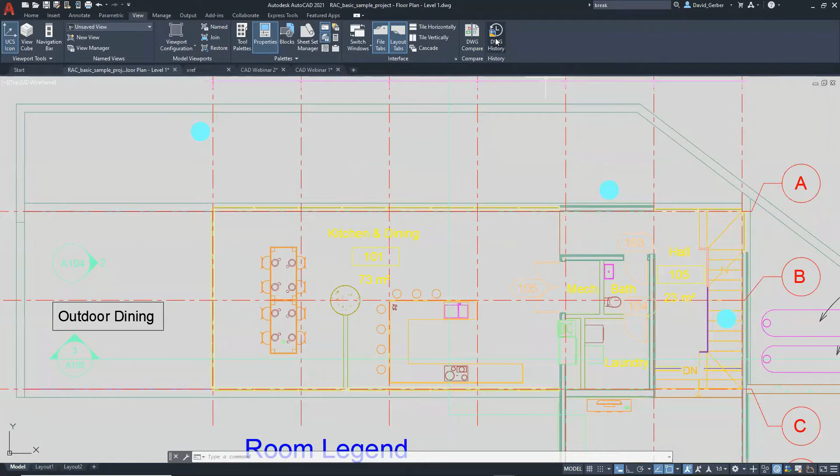If we just go into our view tab, we have this DWG history. Let's just say our client originally wanted a wall here and moved the island around. Then they got back to us after the weekend and said, we talked about it, we actually don't want that wall there anymore, can you please put it back to what we had before? I'm sure you guys have had that kind of discussion before.

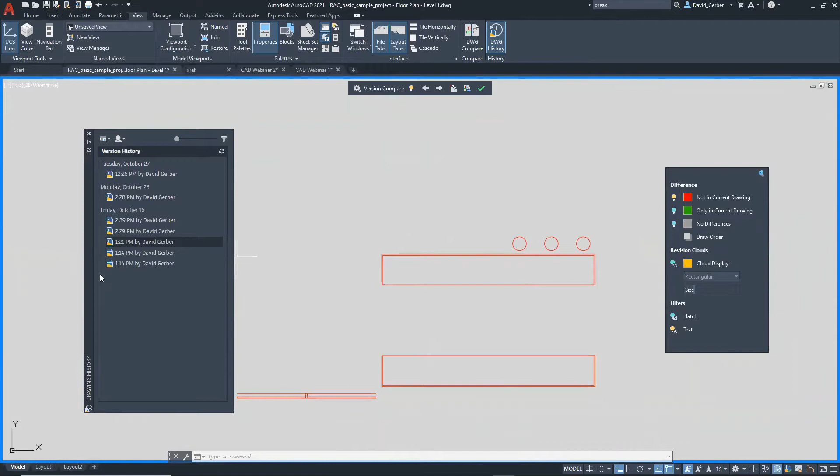So now we get this little DWG history, and I can actually have a look at what the old one was. Let me just check, yeah okay, so this one for example. It gives us this little layers-type panel where we can turn on and off. I'll just turn off the no differences, and now we can see what's not currently in the drawing. I'll move this away as well, and we can see what is in the drawing.

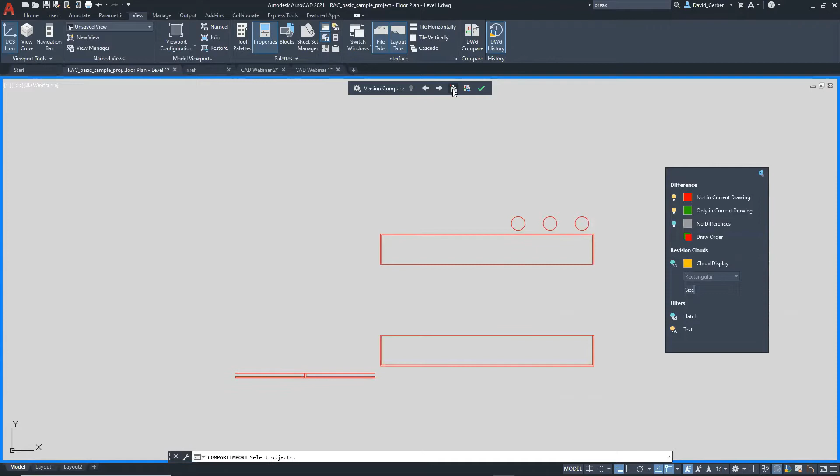So if we did want to go back to what we wanted, say our client wanted that wall gone and wanted it to be open concept, we can just delete that here. We'll turn on what's not in our current, and then use this little import function here. Let's just select everything, press OK. You'll notice it disappears, and that's because it's actually in the drawing now. And now if we just press this, you'll see our drawing has gone back to our previous iteration. So that just saves time.

If I personally ever had to do some sort of change, I'd just basically copy this and move it away here, so that if the client ever did want to change it, I'd just move it back down. That just alleviates that necessary workflow, I guess.

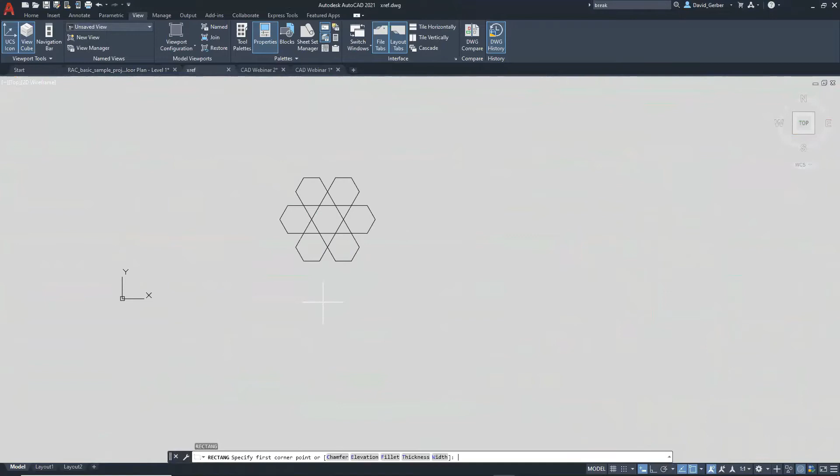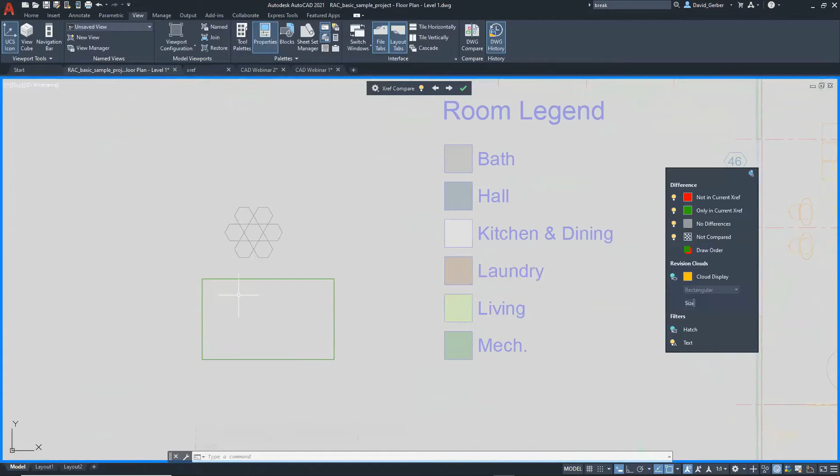We also get the same kind of thing with XREFs. Let me just go to this XREF and maybe put a rectangle in here. I'll save it. If I go back here, you'll see we get this little notification now, so you can turn that on and off if you don't want to compare it. But basically, if I do reload it, it'll do that same kind of workflow where it shows what was in the XREF and what was not, and it'll just show you the changes. Then as soon as I just press check, it'll just reload it.

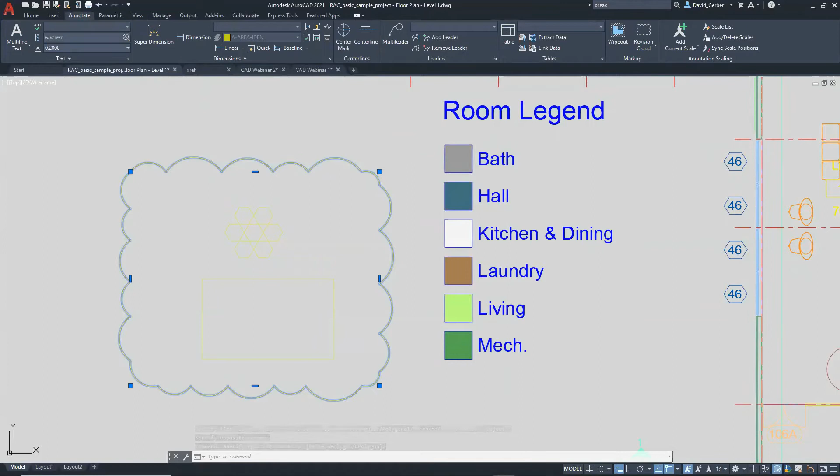Revision clouds are also improved. Let me find it. If this was a revision, I'll change the color because it's a little off, let me find a better one. Layer 0, there we go. So now it actually is its own entity. If we bring the properties over, you'll see it's actually a revision cloud now, which means we have a lot more things we can do with it. Maybe we don't like how big the bubble is, we can change that. So that's been improved as well.

There's also a quick measure tool, which is pretty handy. If you like to type stuff, it's just measure and then geom. If not, you'll find it in your home tab, just where our normal measure tab was. If you just click down, you'll see that there's that quick one now.

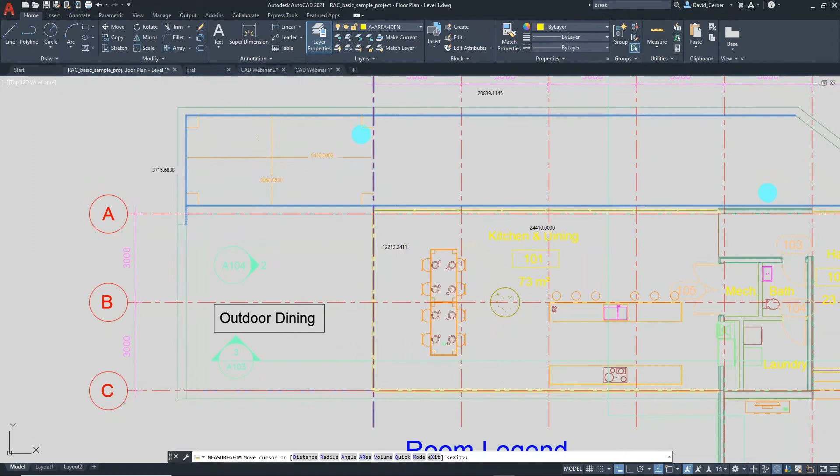What this allows us to do is, for example, I'll go to this one where you can actually see it's already giving us the dimensions without having to measure anything. So we can see it's 3000 millimeters. And if we just click down, it will actually create that area tool. If we just hold shift, we can add a couple more areas, and you'll see it's already calculating that area. It's in millimeters squared in my case, but at least you don't need to use the area command anymore, and the perimeter's there as well for you. So it's just a very quick and easy way to check a few things.

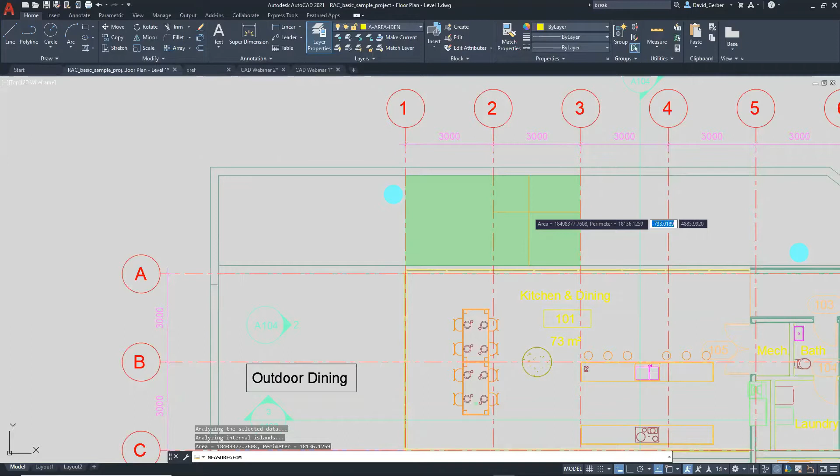You'll also notice the little right angle signs. That's just basically telling you that those lines are at a right angle for you.

The trim command has also been improved. I'm just going to switch to this one here and create a couple of things. Now the trim command is smart enough that we don't need to worry... oh, I changed it back to the old one. Let me just go to this one. It's smart enough now to know that we don't need to select what we want, and same with the extend as well - it'll extend it back. So that's same area here, trim and extend, but now it's a bit smarter.

If you did like the other one, you could just change it here, some mode, and then we'll go back to the standard mode, which is where you have to actually select stuff. Just change it back to quick.

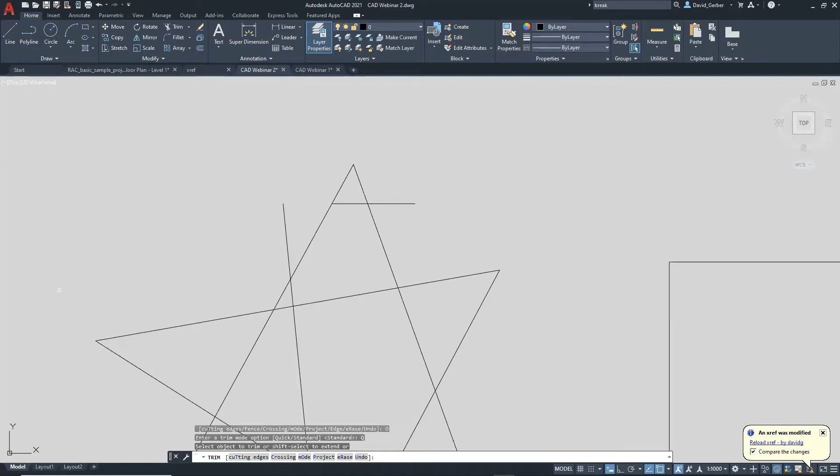So that's very quickly some things for the new 2021.

If you started to play around with blocks from the last time, you'll notice that insertion point is pretty far off - you can actually change that. We'll just go to bedit, which is our block editor. If we notice, it's just off to the side basically. So all we have to do is move it to 0, 0. And then we just close our block, save the changes, and now you'll notice our insertion point is where it needs to be. That may or may not be useful depending on if you wanted your insertion point to be that way, but it's just something to note.

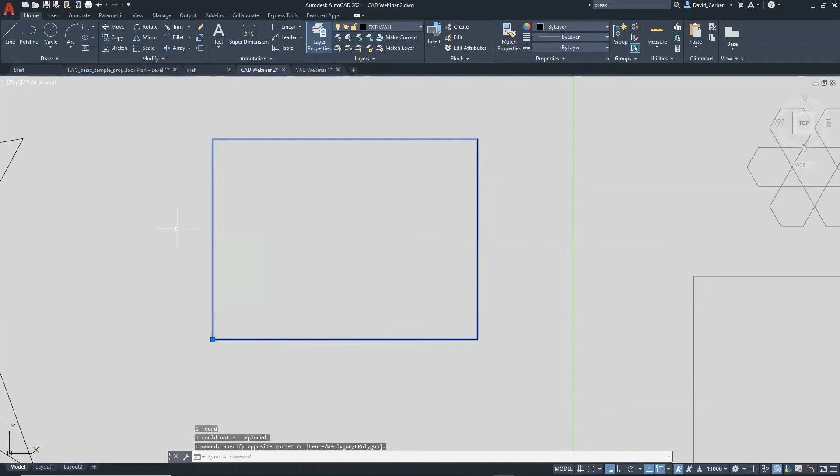Maybe also when you made the block, you wanted it to be explodable but forgot to do it. So if I did explode, for example, you can see it could not be exploded. Again, I can change that in my bedit. I'll just go back, and in my properties here you'll see it says 'allow exploding', and I'll just say yes, and save the changes. Just move that away, and now if I explode it, now it's not a block anymore.

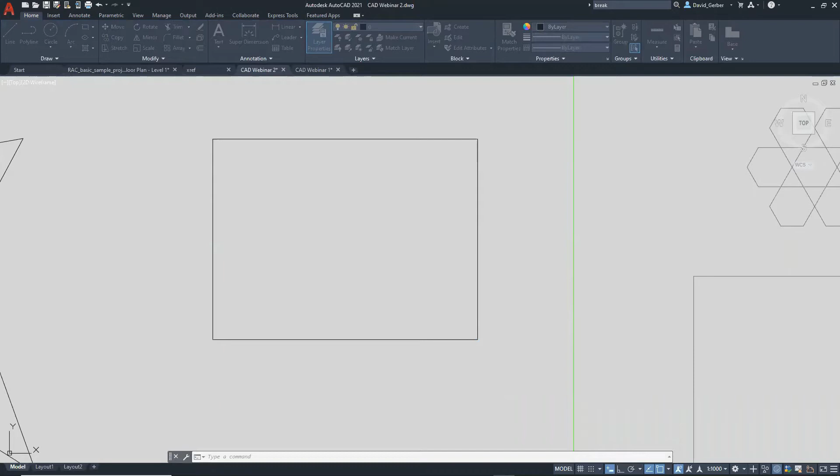We can also rename blocks. Say we made a mistake, we'll just get this little one here, so maybe 'block edited' or 'rec edited' - we wanted it to just be that. So now that block would be renamed.

In terms of some handy commands, sometimes you do some work and then you wanted to bring back what you've done before. So there is an oops command - I'll do a new one. So we did some work and then we deleted that, and then we did some more work. We're like, oh, actually we don't want to undo the work we've already done, but we did need that back. If we just did oops, it'll bring that back for us, so that way we don't have to worry about redoing work after our 'oops'.

There is also break, where you can select that and pick where you want to break the line, which is pretty handy because then maybe we want to fill out these ones, for example. It's basically just under here, the modify tab. So there are two now - break is the original one, but in the improved one in 2021 there's break at point. So we could just click that or type it, depends what you want. And we can just say break at point - you'll notice that these lines are actually just broken where I set it to be.

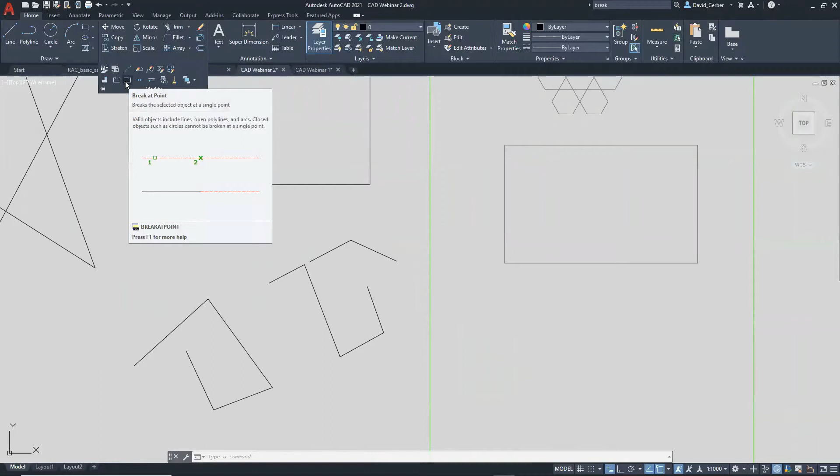That's just under the modify tab if you like to press that. And then again, it's break at point if you like to type, and just break is the normal one.

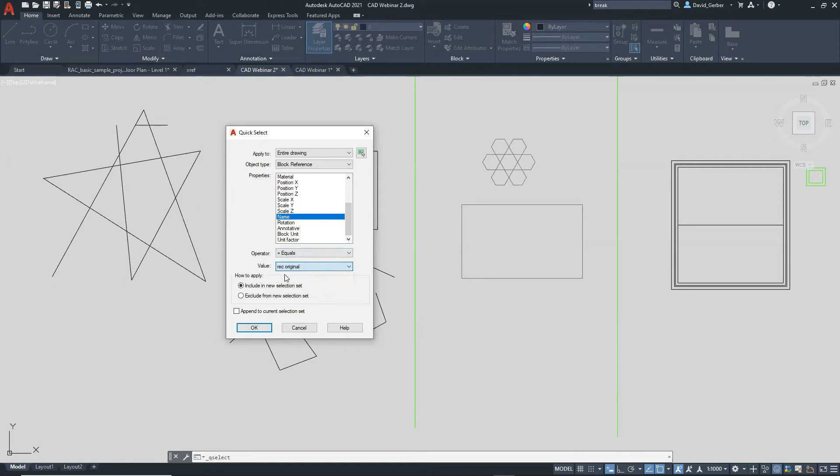Quick select is also something I like to use. So if you just right click quick select, I'll move it onto the screen, you get tons of stuff that you can start to pick. So maybe I want to get all my block references, and I can just find basically anything. You just specify, and it's really easy to find stuff. I guess I'll just go name, and maybe I just want this one. Select all the ones of that original, and it'll select it in the whole drawing.

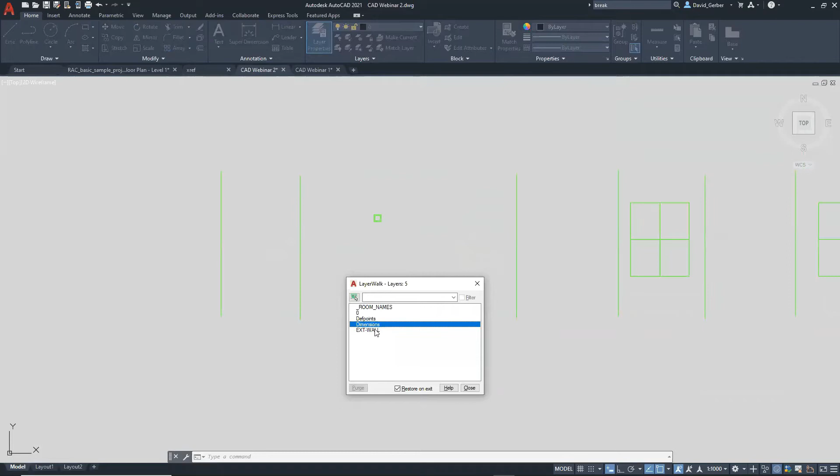Another similar one to that would be LayWalk. And that's just going to display all my layers. As I start to press on the different layers, it's going to show me what's on each layer, so I can see all my different things. As soon as you exit it, it'll just bring everything back. So maybe you're looking for something and you wanted to know where that element is sitting.

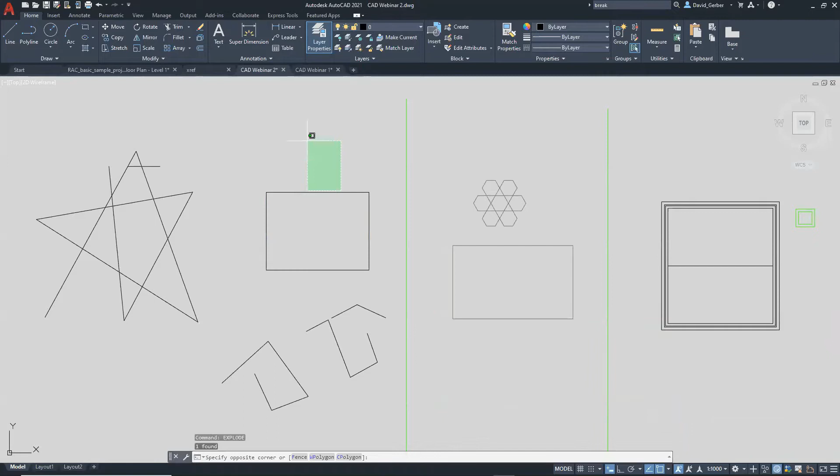Another command which is pretty handy is the boundary and join. A lot of people do use join. So actually, I'll just explode this one, and then I'll explode it again. So there is that join command, right, that we're used to using. So now it's that. But there actually is a boundary command, which is pretty similar.

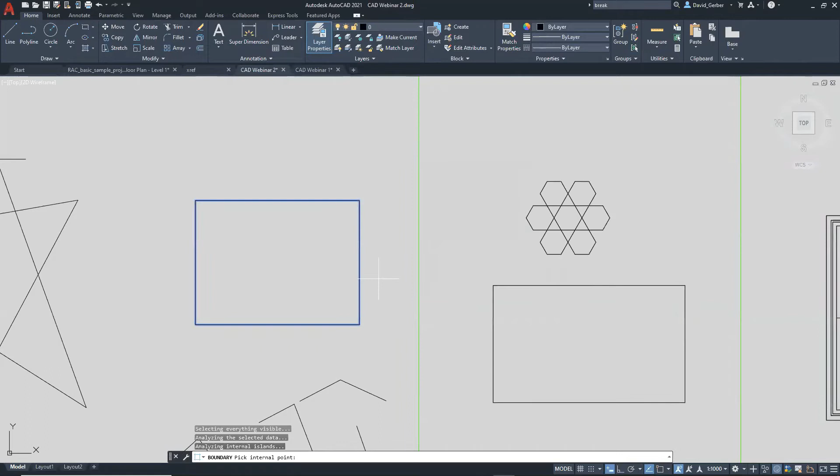It'll create a boundary basically of the same thing, and you can kind of say what you want it to be. So I'll just say here, and I'll pick that point. Now you'll see it's created this boundary, and now I can move it away. So maybe I didn't want these to be exploded, but I wanted to create a join and a duplicate.

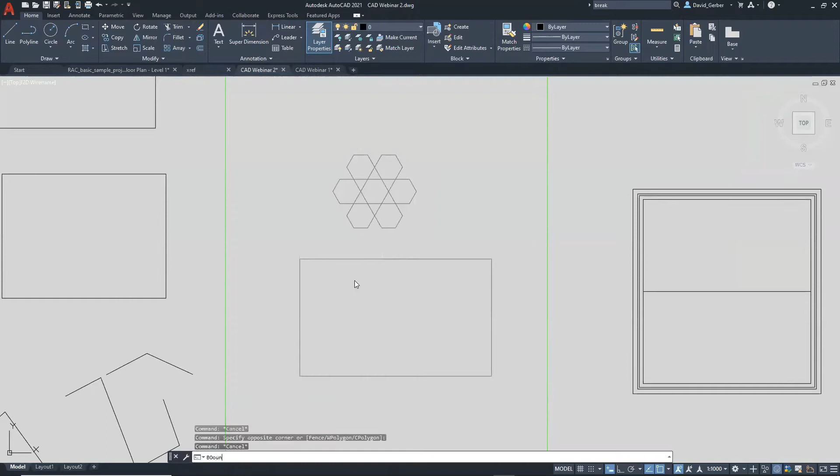So that can actually be transferred over to an XREF as well. So if I did do boundary, and I started to select these ones, it's actually transferred over from the XREF, and I could just copy them basically into my current folder, or file, sorry.

A similar one is ncopy as well. Maybe you guys are aware of that one. And ncopy will do basically that same thing. So I can start to select stuff from my XREF and then put it into my current drawing.

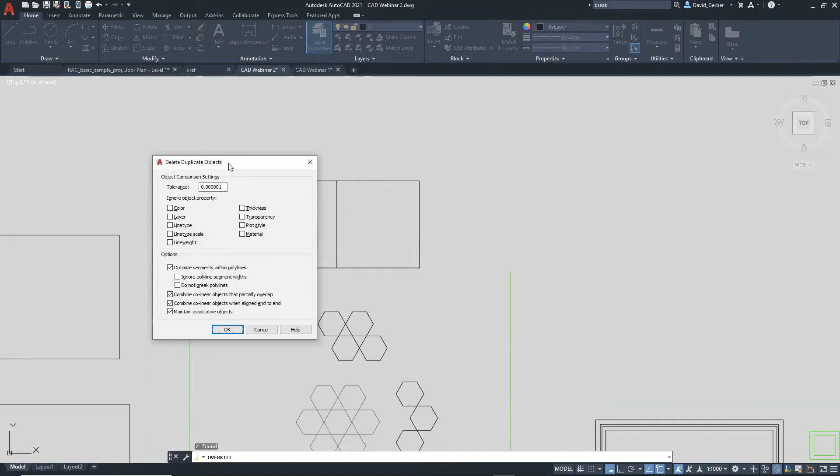If we did, maybe we'll do a rectangle and another rectangle here. I do like to use overkill sometimes. I usually used to do that whenever I do 3D printing, because then at least the machine doesn't need to do as many lines. So if you did do overkill, it'll give you this basically, and it'll give you your tolerance. Once I do it, there's only going to be that one line here now instead of the two, and you'll notice that it's actually connected these ones. So it's something to think about if you do have overlapping things. It's a quick way to clean it up.

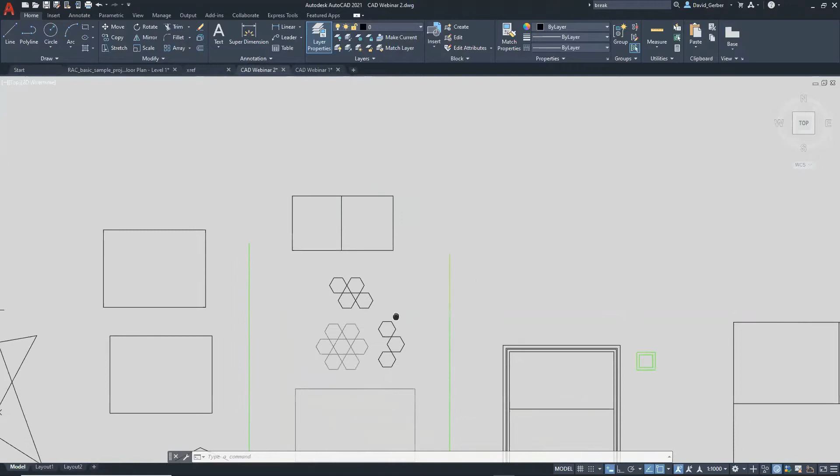In terms of hatching, I like to, at the beginning, basically just do HP layer, which will let me, wherever I put the hatches, they'll go onto that layer. So I'm just going to say hatches, and it'll create that hatches layer for me. I also like to use HP color. I can set that like 252, which is kind of grayish. So now all of my hatches are going to go to my hatch layer, and they're going to be that certain color. So now if I do my hatch...

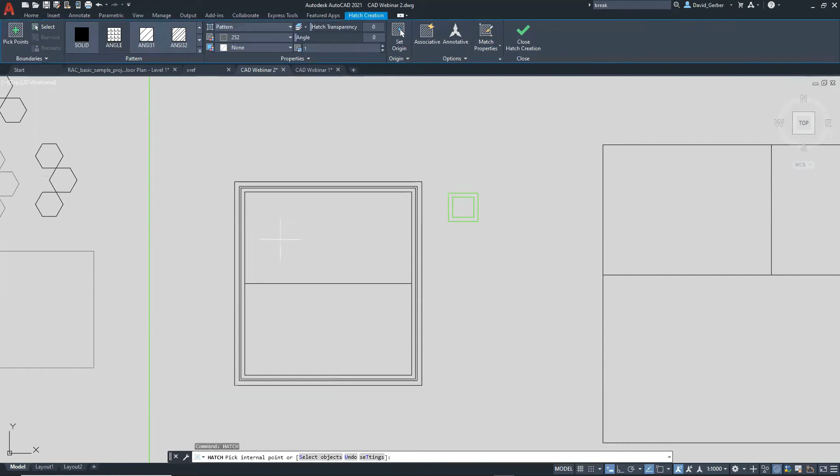Let me just select the brick because we'll need that in a second, and I put that here. Let me just move my properties over. You'll see that it's hatches and it should be 252. It's displaying white... they are displaying that though, it's just the layer that's that, but the hatch itself is 252.

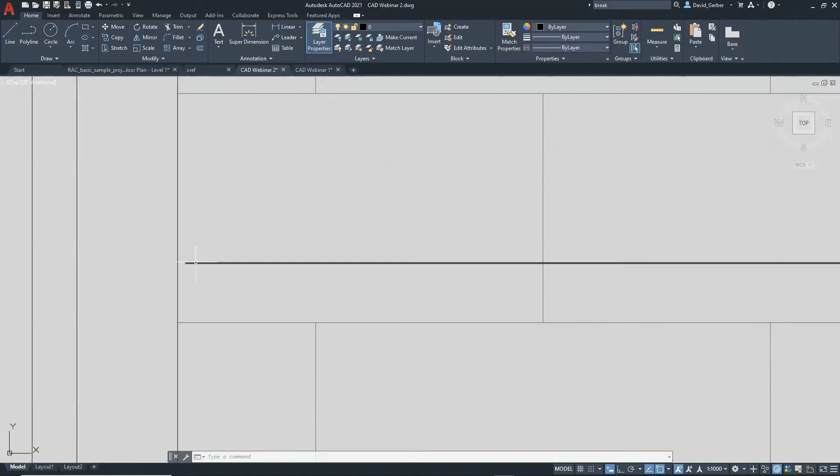Sometimes you also get stuff from third parties, so maybe these weren't supposed to be like that, but if you notice, there's just a little bit of a gap, and that could happen depending. Maybe it came from Rhino and they just didn't bring the wall perfectly enough. So there is an HP gap tool.

If I set that maybe to 1,000, which is the tolerance, I'll just delete this and create a hatch and put it here. Let me just redo that HP gap. Sometimes I can get it to work, sometimes it doesn't want to, but usually it gives us a warning.

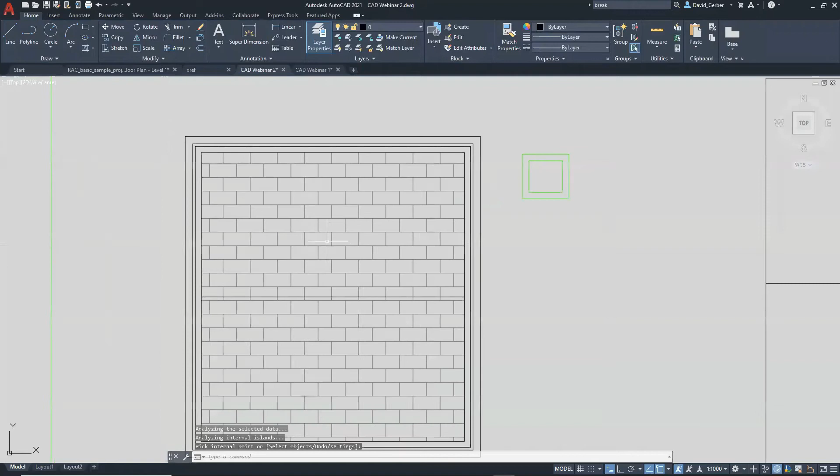Let me just play with associative and bring it back. Sometimes that forces it, but there should be an error if you're not already using associated hatches. Let me try and force it. I think 2021 is pretty good at picking it up, I had problems with other versions, but it should say there is a gap and ask if you still want to hatch, and it'll actually fix it for you. I can't force it to do it at the moment, but 2021 is pretty good at fixing that.

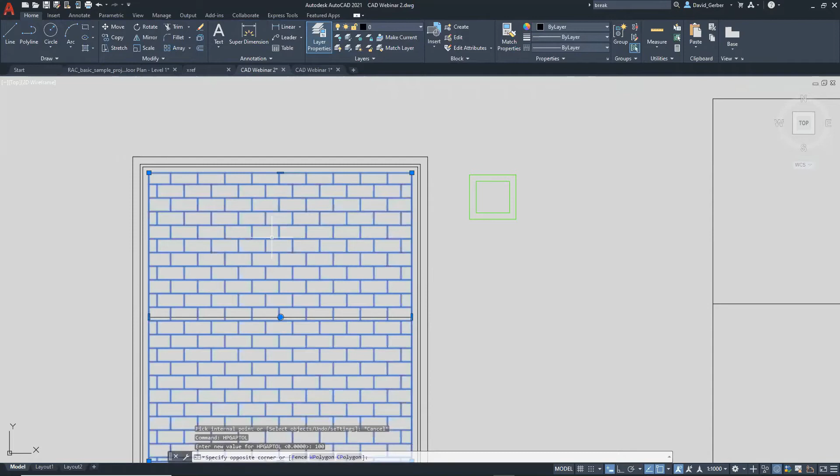So the HPGAPTOL is basically our friend for hatches. Let me just try it one more time. It worked when I did it this morning. I could force it. All right, that's right.

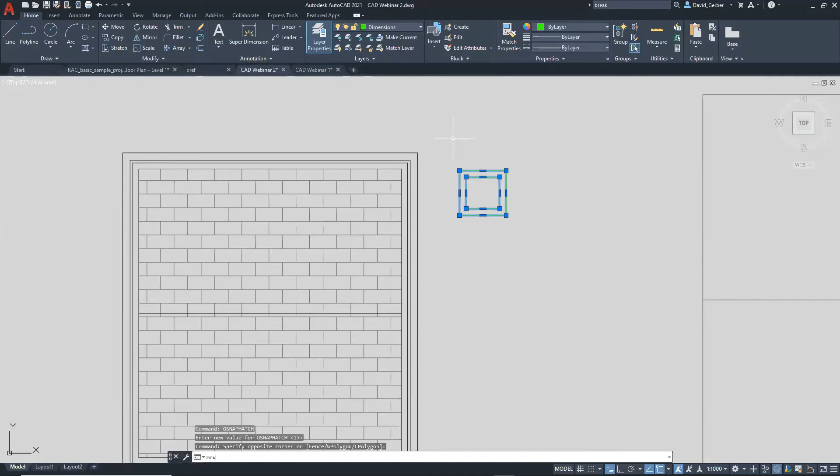We could also use the OSNAPHATCH, similar to our OSNAP before, but now if we set it to 1, we can actually snap to our hatches. For example, if I move this, I can snap it to my hatches, whereas if this is on 0, it won't actually see stuff to hatch or snap to.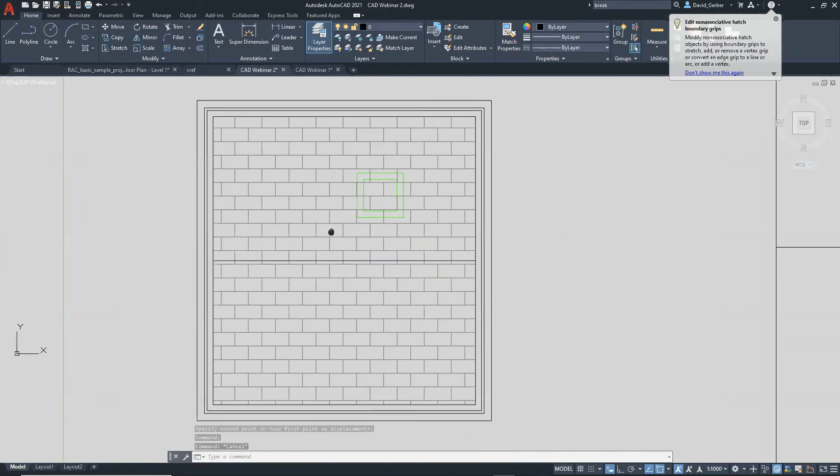We can also play around with the origin mode. If you like to type, it's HP origin mode. Here there are 5 different ones. I'll quickly bring this up, let me just get my internet open.

So these are the values basically. You can set it to these if you always want, for example, your bricks to be in the bottom left corner - then you could set it to 1 and it'll do that. I'll show you that if I did 1 and then created a new hatch, you'll see that now my brick has changed. You can still do the same thing if we go to origin, these are basically the same ones - if I change that, these will change. So that's the 0, 1, 2, 3, 4, 5.

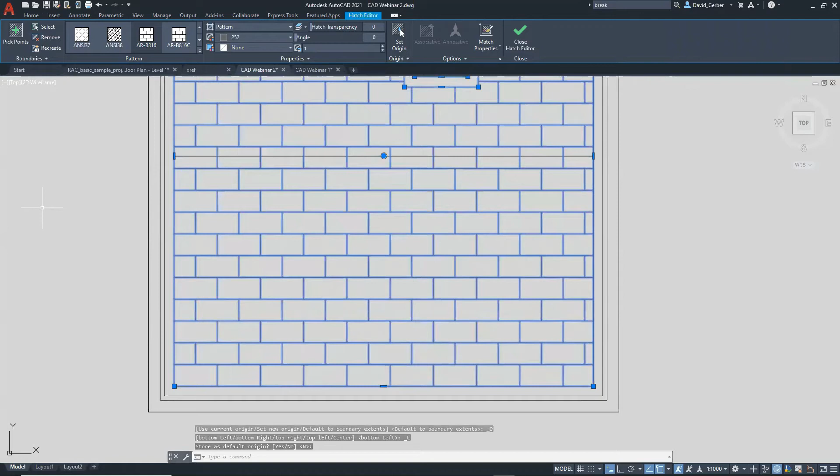So it's just something there. If you thought, I wish I had a bit more control over my hatches, that's basically where you can find that.

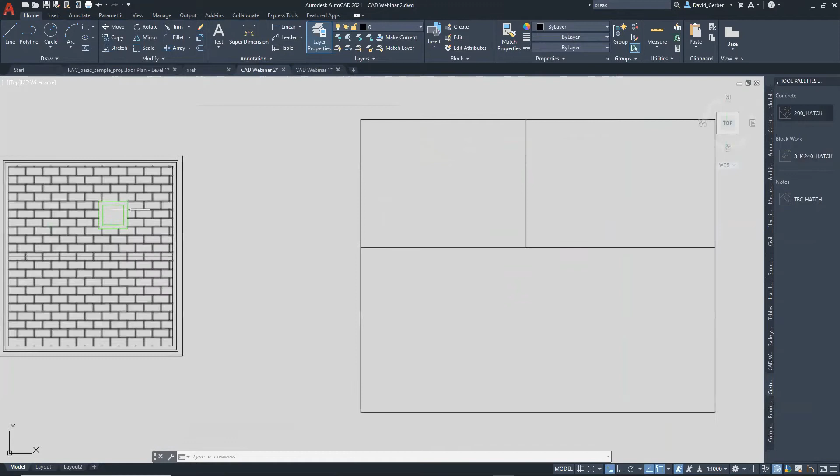We can even put our hatches in tool palettes. So if there is something that you use a lot, let me just find my hatches. You can basically find the scale that you want, the color that you want, and just hold your right mouse key and drag it over. I'll just do that here for a second.

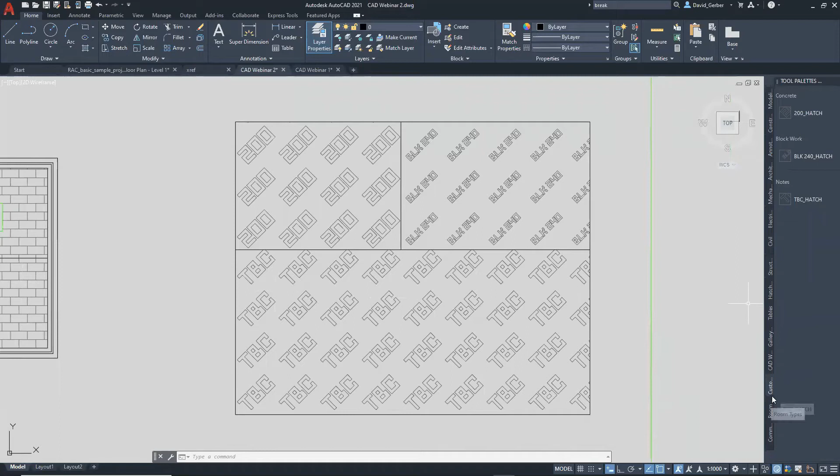And then basically now I could just drag my stuff into here, and I don't even have to think about it - it's already set to the scale that I want, set to the color that I want. I believe Autodesk has some in here already as well that you can do similar with, so it's just a little bit faster, and you don't have to worry about typing hatch or finding the hatch button and setting everything.

So I'll just have a quick look at some dimensions. I'm just going to quickly make these. Okay, and I'm just going to break this.

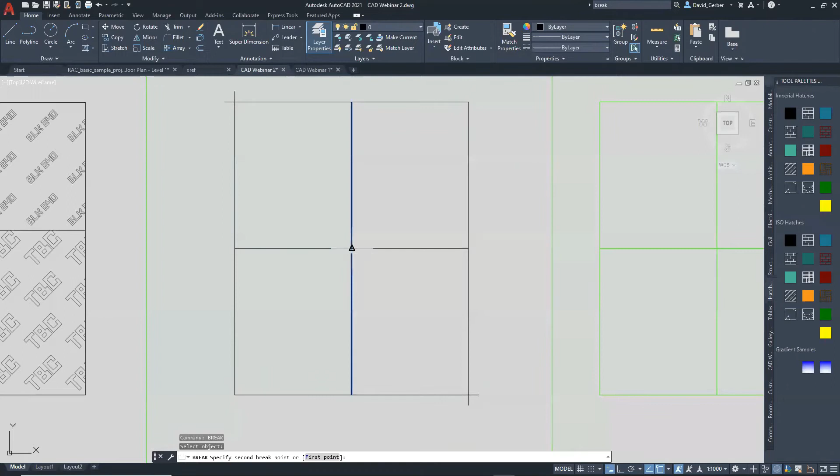Okay, so we could use DimSty. I'm not sure if you guys have looked into your DimSty, or maybe your company has already done this. But if we go to our modify, we can start to play around with our dimension style, so you don't have to use the out of the box one if you don't want to. For example, I've changed my lines and my spacing and even how it offsets from the lines. My symbols and arrows, you can pick all the different ones here.

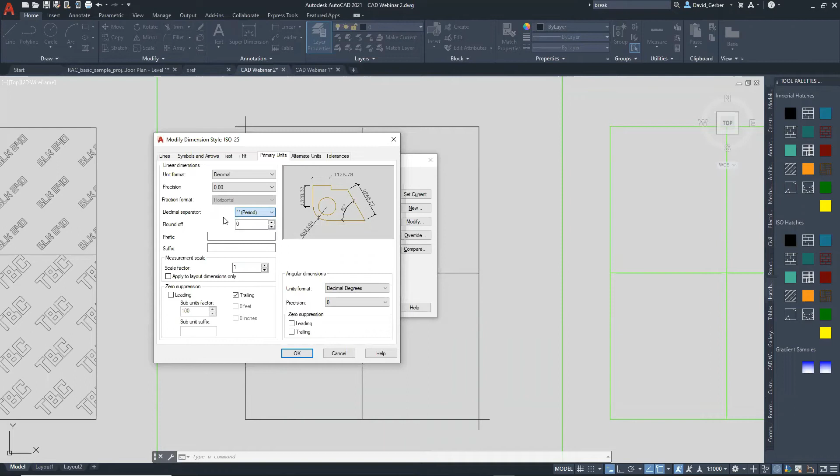I set what I want my arrow size to be, and I basically just changed everything to how I like it. Same with the text. I made sure my text is always that color, for example, and how you want it to be aligned, even the offset distance from the line itself. And then personally, how I want my units to be and even my precision. I also changed this to a period because sometimes the out-of-the-box one is a comma, so you can change that as well.

That's just something I like to do, because then there's a few things that I like to use for my dimensions. I do like to use a Lisp that I use - it's just an automatic dimension, basically. So if I just do AD and select my options, it gives me this. I can just say where I want my dimension to be positioned, inside or outside for example, and then I could just start to pick my lines.

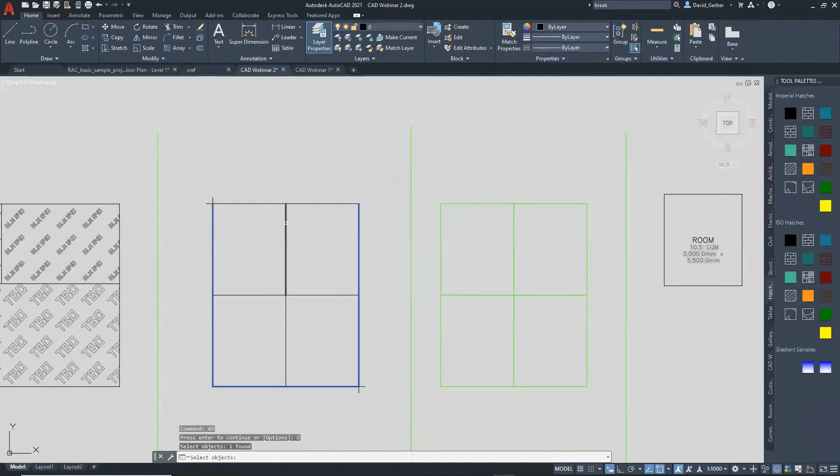As I did that, it already put everything on. This one's not ideal - maybe I would run it again and just make sure, because it'll actually offset it as I said, and it'll just do that. You could also use your quick dim, which will do pretty much the same. I just chose the other one because right away it's offsetting it how I wanted it to be, and it's just a bit more uniform. I'm just a little bit more picky that way.

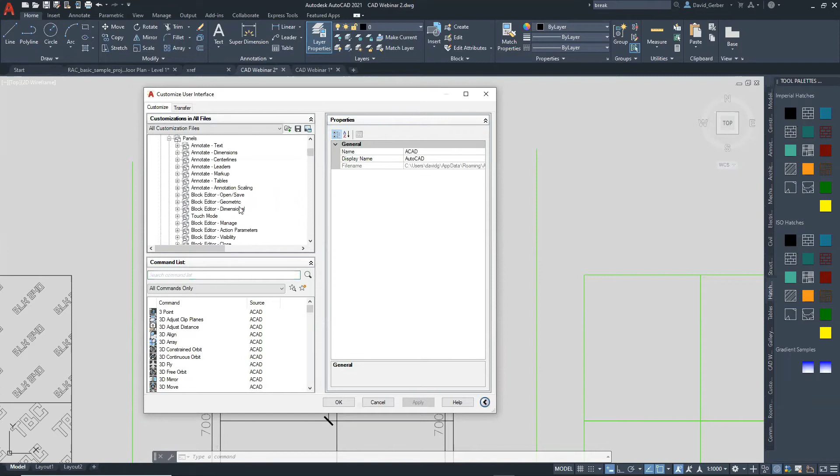I've also created my own what I call a super dimension tool. So I'll quickly go into the CUI and show you. I've changed that normal one and I've changed it in my annotate tab. So I'm just going to go to my ribbon - you'll have them sometimes in your annotate tab. So this is the normal one, dimension, and this is just my super dimension that I made. It's also in my home tab.

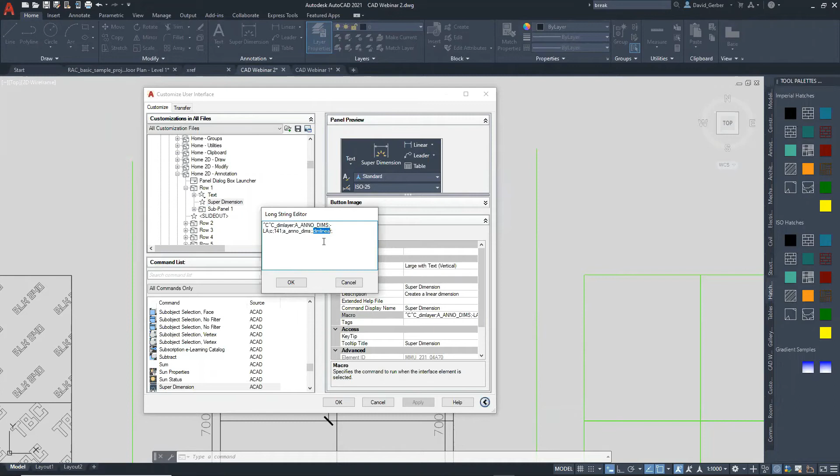Annotation, here, super dimension, and then I just said large with text, I just said what it was. And I've created this macro, so basically it's going to create a new layer every time I do it, and it's going to name it A_ANNO_DIMS, which will create a new layer. I say the color that I want it to be and what it actually is - so it's a linear dimension.

So now every time I just use my super dimension and I go here, let me just bring my properties over - you'll see it's made my annotation dim, and it's a bit buggy, but if I just go to it again, it'll change to the color as well that I specified, 141, in my macros. So basically it's created the dimensions, created my layer, created my color, and it's associated with the dimension style that I created. So now I don't have to worry about it. See, like if you notice that active layer was 0, but regardless of what I'm using, it'll always put these on their appropriate layer.

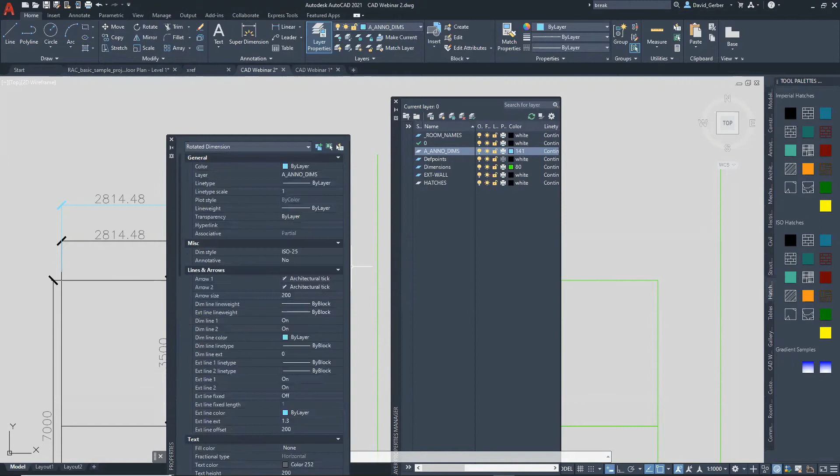I'll just bring this over from my other screen as well. You'll see that it's changed its color automatically and it's put it on its associated layer, and it has all of the properties that I want it to be. So I don't even have to think about changing to my layers anymore - it's just going to do it automatically for me. I'll just save that, that's all right.

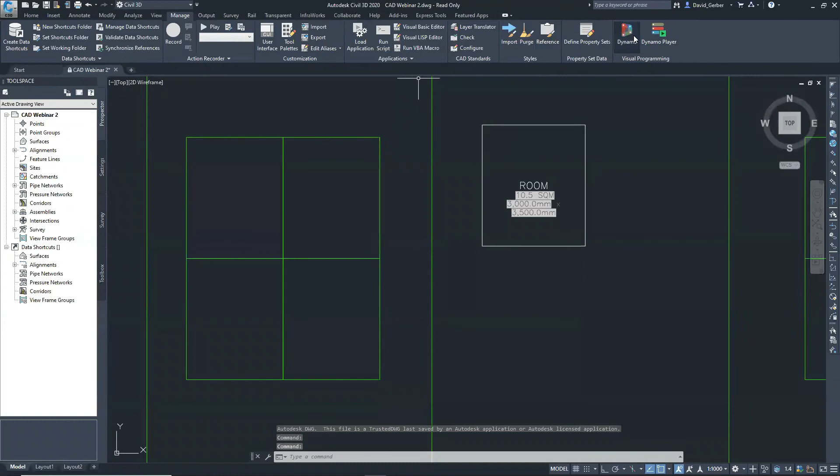And I'll pull up Civil 3D because a few of you guys really like that Civil 3D thing. So I'll quickly show you another script that I've created - let me just go to my Dynamo. It's just going to read the layers that I want it to do, so polylines, and it's going to figure out which one was drawn first, and it's going to put in a room name and its number. So if I just press run, you'll see that it already created that for me.

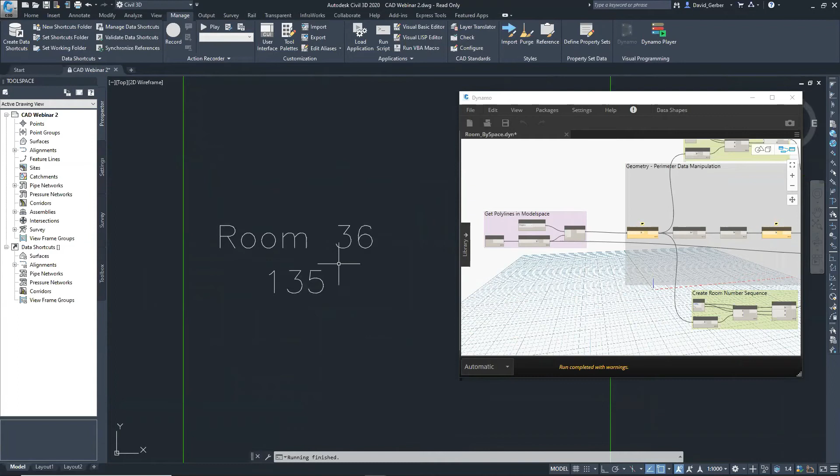I'll just change this to automatic just to show you the power of it. So if I copy this over and I moved it here, for example, and I press enter, it's already starting to create it. I've obviously played around with it before, that's why it's moved up to 36, but regardless, it's always putting it in the middle because that's where I specified, and it's always counting how many rooms I've made. So as I start to copy these around, it's starting to number them all. And then again, I can always just go in here within CAD and it's text, so I can change it.

Okay, I'll just close this out. You can still do something similar in CAD itself, and I'll show you that right now. Let me just minimize that.

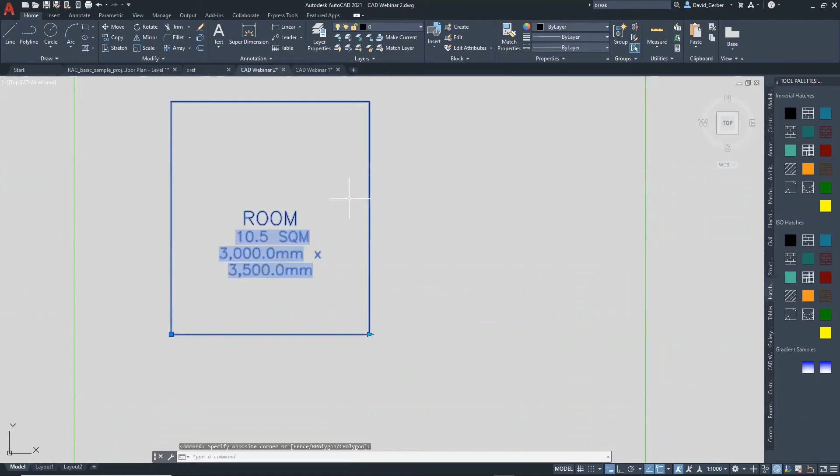So I've done something similar here. Basically this is just a parametric room with some attributed text. If I go into here, I can change this to whatever I want, storage maybe, and it'll change. All these are changing based off of my calculations that I've put in, and I'll show you that right now quickly, then I'll show you how I adjust that.

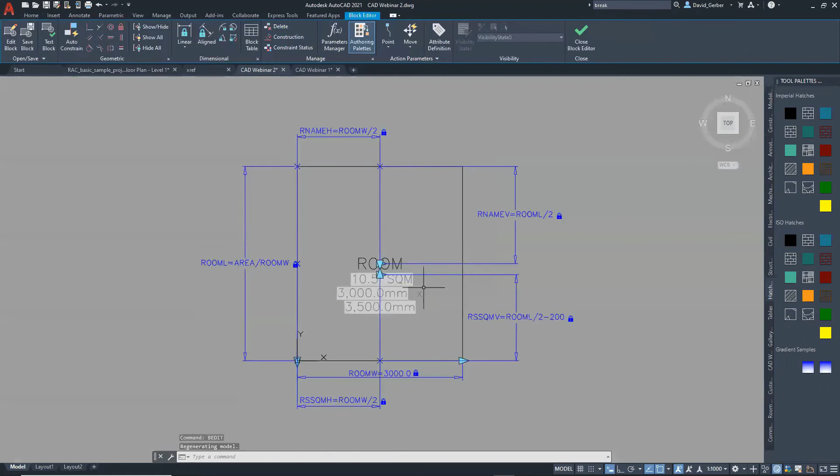So I'll just go into B-edit and I'll go to my room layout. Last time we talked about all these different visibility options, rotations and stretches and all that. There is also another area, which is just here - the constraints. So I basically created a constraint and I've constrained them to the lines.

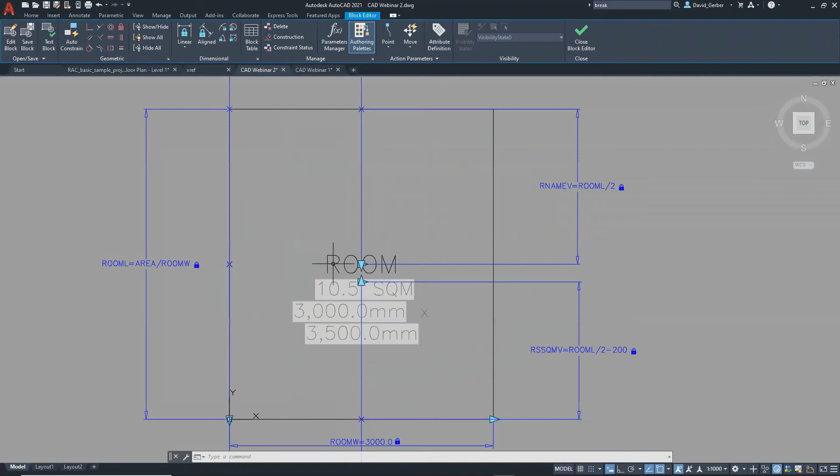So even my text will always read the room length divided by 2, and same with here, the room width divided by 2. That way it's always in the middle, regardless of when I start to shift it, it'll always put it in the middle. And then even my area.

So basically this was just an example of, I want my room to be 10.5 square meters and I want to find a shape that will always be aligned to that. So these are all calculating against one another to always be correct. I'll show you that in an example.

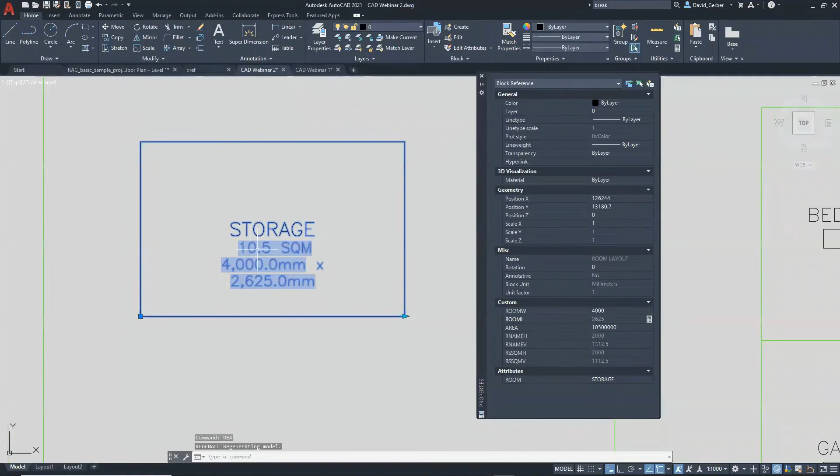Maybe I wanted, let me just select this. Maybe I wanted my room width to be 4,000, for example. Right away, it's going to calculate that based off of that square meters, but I just need to regen it. And again, even if I just do this, it'll always constrain them. You do have to regenerate it unfortunately, but you'll see that it's there.

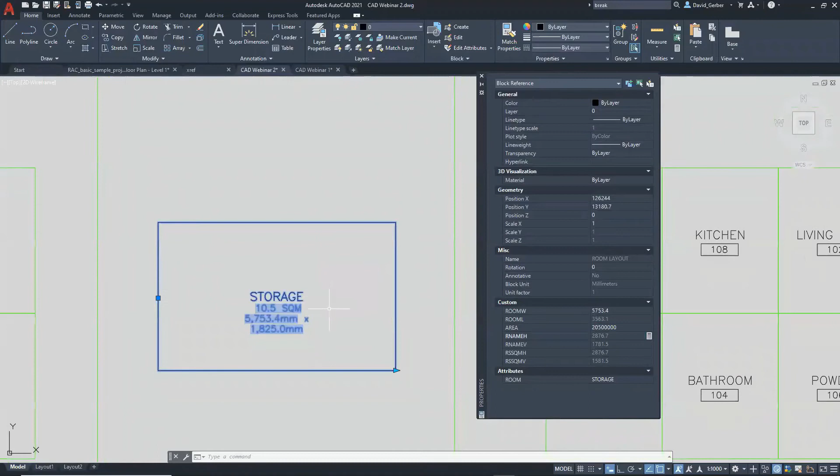And if I did actually change this to maybe - oh, actually, because it's in millimeters, I'll just put it 2 here, that'll be easier - and regenerate it again, you'll see that this switched to 20.5 square meters. And now again, I could start to play around with it.

So these are basically just all calculations from the B-edit. I'll just go back into it because these are field conditions. So I'll go into this one here and I'll edit my field and I'll move it to this one. So there it is - it's a formula.

Can you see it in here? No, I'll go edit this field as well. So I'm basically taking an object similar to last time when I showed you the viewport object. I'm selecting an object, which is one of the lines, and I'm getting its length and just taking its current units. Then the formula is just length times width.

And then it's always going to be reading those as they change, and that will update this. I just have some additional formatting to add a suffix to make it how I want it to be, and also converting it to square meters instead of millimeters.

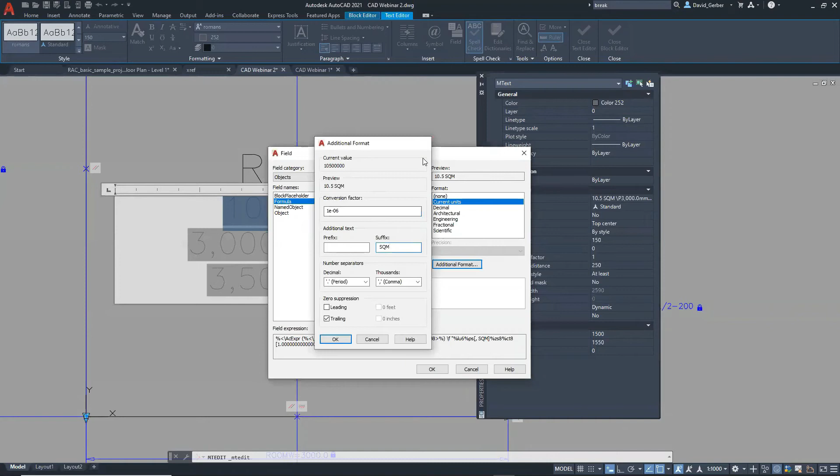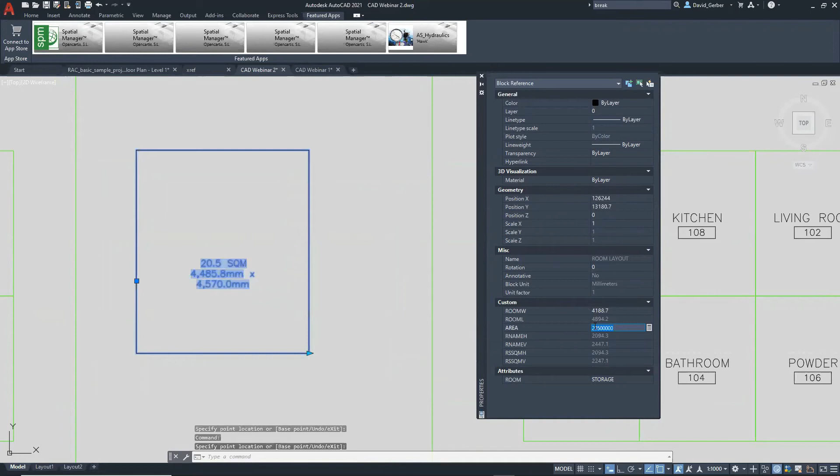So I don't even have to think about typing anymore, it's just going to calculate it for me. The only thing is, it's a little bit buggy - if I did change the area, for some reason the grip doesn't work, and you'll notice stuff gets askew. I could probably tweak it, but this was just to show you guys the possibilities.

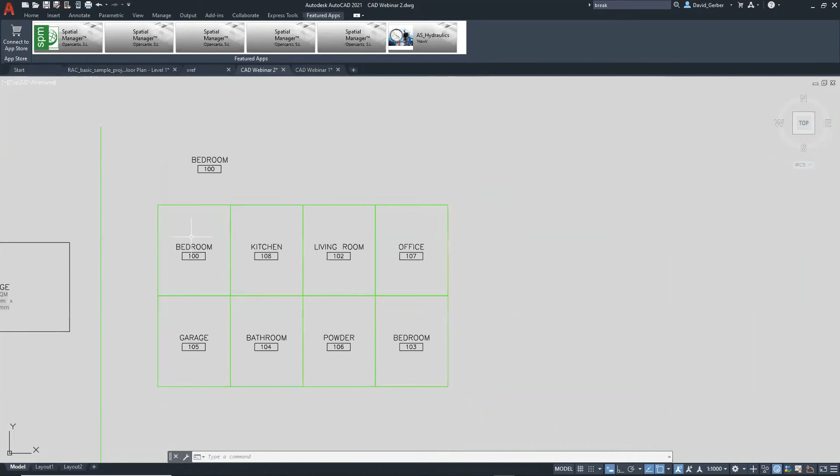We can also do something similar with these. Actually, I'll quickly go through a couple of the first FAQs, and then I'll show you that one, which is a similar scenario but using Excel. So someone asked about...

The view names, or named views rather. So if I just go into here and go to my view, I'll create a new view, and I'll just move that over here. Maybe this is our window schedule.

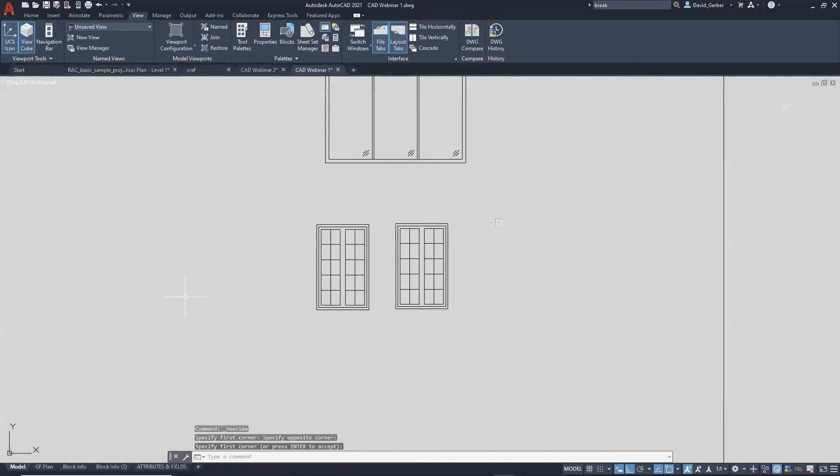And I can actually define a window. So I'm going to say this is my window here, and I'll say OK. Now if I go back here, I can actually get that same thing by going to my window schedule and it'll zoom into here, so I don't have to worry about finding it. This is going to adjust to that weird scale I created last time, unfortunately, because it's picking up our viewport.

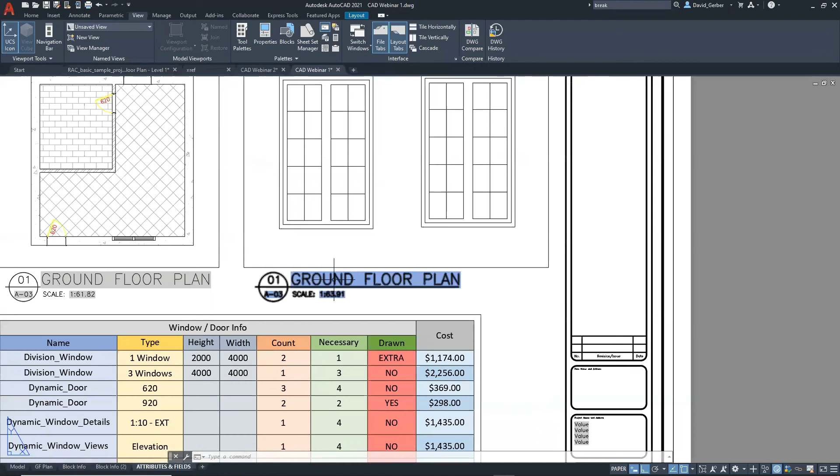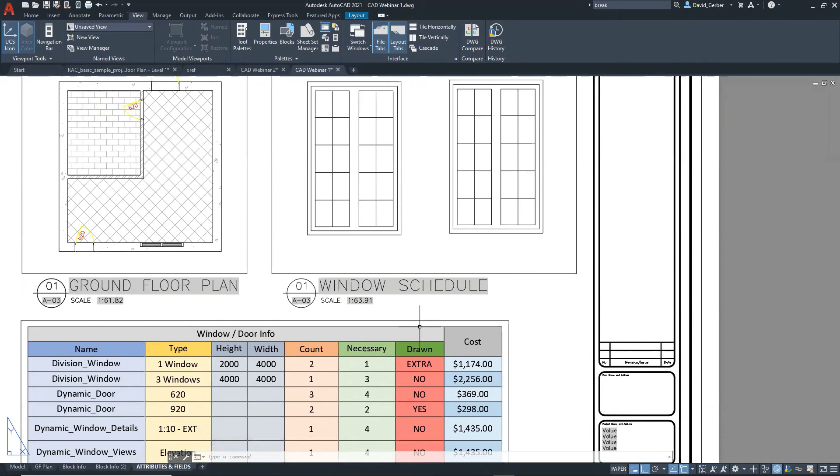I couldn't find a way for it to actually find the field. The closest I can get is if I just edit this. It's basically just a named object, and it's going to find the named views. I can just change it to window schedule, say OK, OK, and now it's changed that, so at least I don't have to type it. I wish it would pick up from the viewport and know its view name, but it won't actually find it, unfortunately.

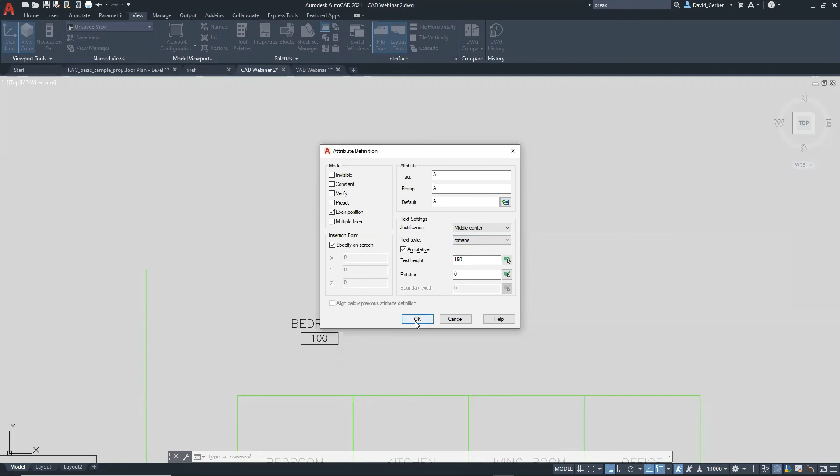So that's the closest workaround I found for that one particular question. There was also some text ones, so maybe I'll just go back into this one. If we do ATTDEF, and I'm just going to say A, maybe middle center. OK, so we can make it annotative, and then let me just find, I'll just put that in here, and I'll put it, oh actually it's a polygon, and 3. If I did make it into a block...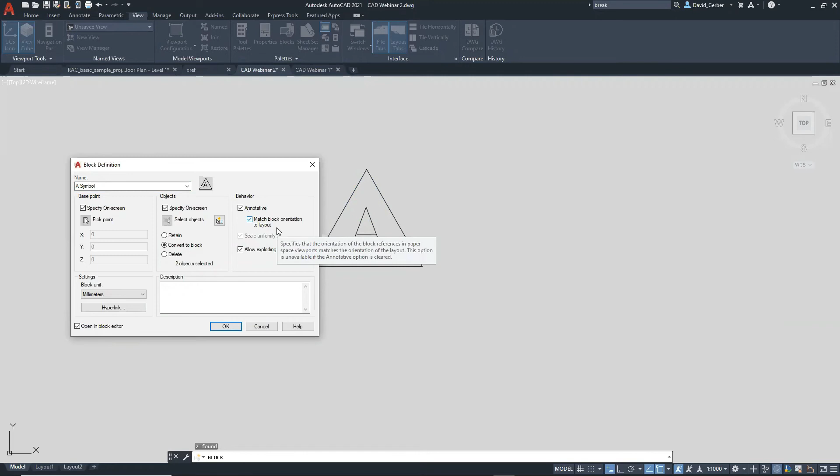And I will just make it a symbol. Then as soon as you click that it's annotative, you'll see that this ungrays. So basically, if you click on that, the person was having issues with their text rotating as they were rotating blocks. So this is the way around it, so now it'll always match it. If I did, let me just select that insertion point and select our block and just make it our block.

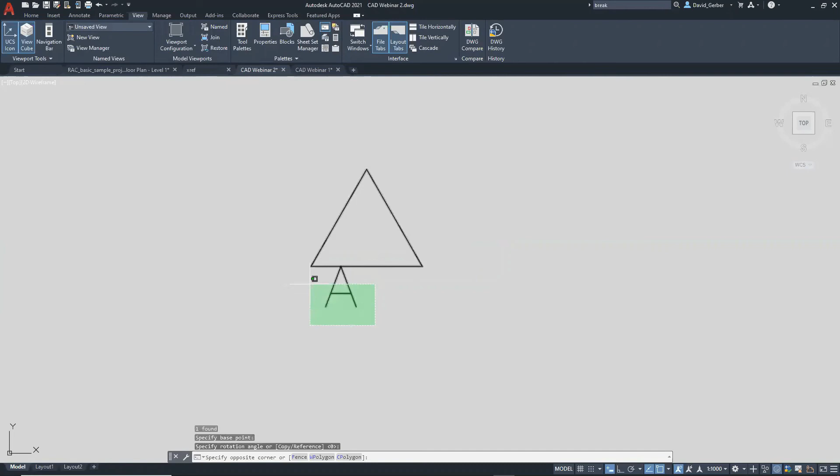So now as I start to rotate, you'll see that it's, oh, I did it wrong, but basically the principle is there. I just did it really quickly. As you start to rotate, it will keep that A always facing upwards and readable. So that's the way around that one.

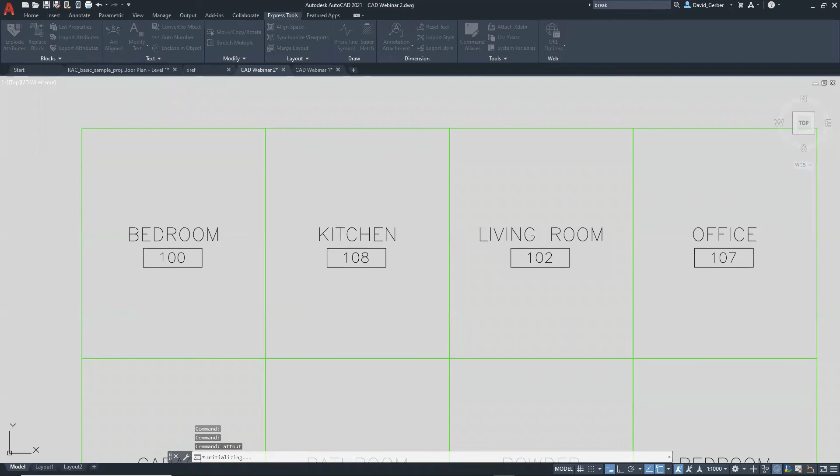Similar to the Civil 3D one, we can edit attributed text, just under our Express tools. If you have AutoCAD LT, unfortunately you won't be able to do that. But a way around it, say I wanted to renumber all these rooms, I could just go to export, and it'll give us this. I'll just save that one, I'll replace it. And now I can just select all the attributed text that I want to change.

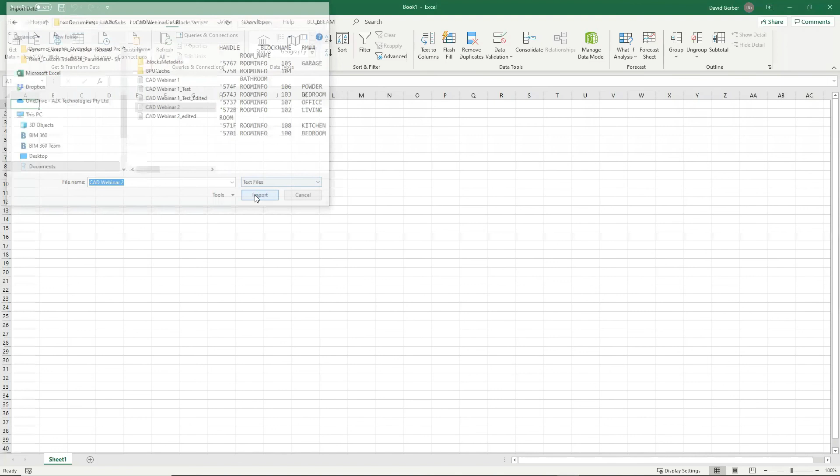It's outputted that folder. Now I'll just open up Excel quickly. I'll go to a new one, and we just need to go to data and then text, and we will find our CAD Webinar, and we'll just load it in. So you'll see it's given us all that information that we had in here.

As you start to adjust this, you'll notice that I'll just copy this and I will just insert another row. Just move this over, I need to copy this same one. So I'm just going to change this to a 3 and this to nothing, and then I'm just going to say equals, I guess, this minus 100 plus 1,000. So basically, I just wanted to make them in the thousands.

And now if I just hide this row, and I'll just save this. I already have one done, so I'm just going to skip that. But if we just go into import, and we go into our edited one, and I click open, you'll see that it's changed all these numbers to 1,000. And again, if I go to the original one, it'll change it back to those ones. So very quickly, we can start to change it.

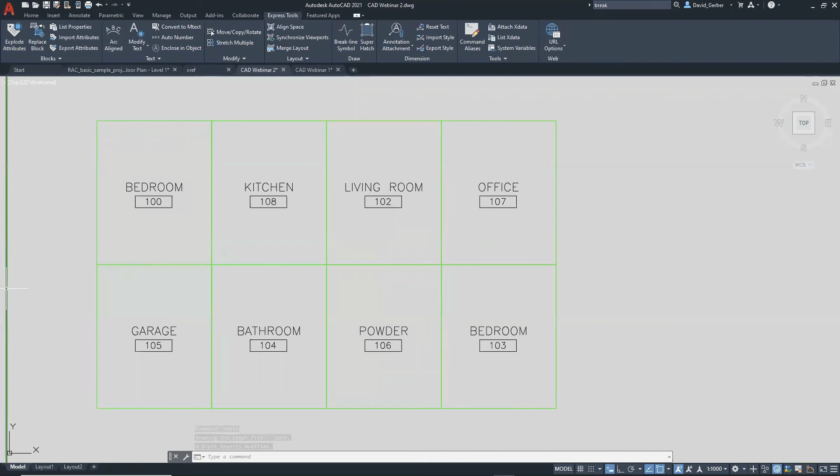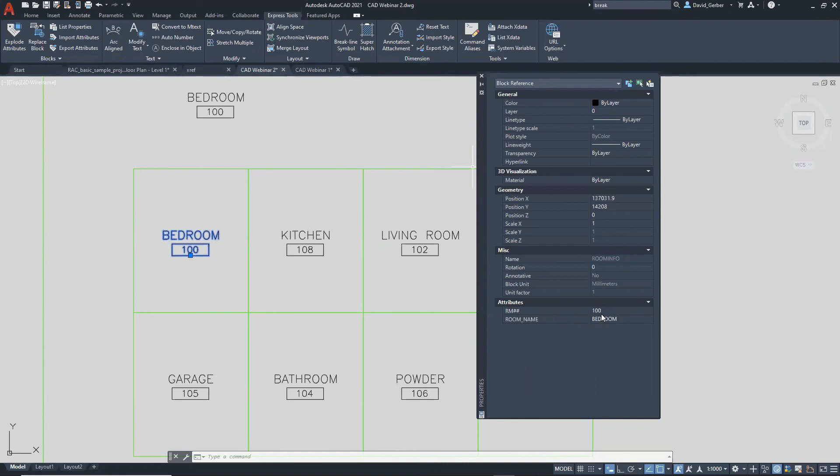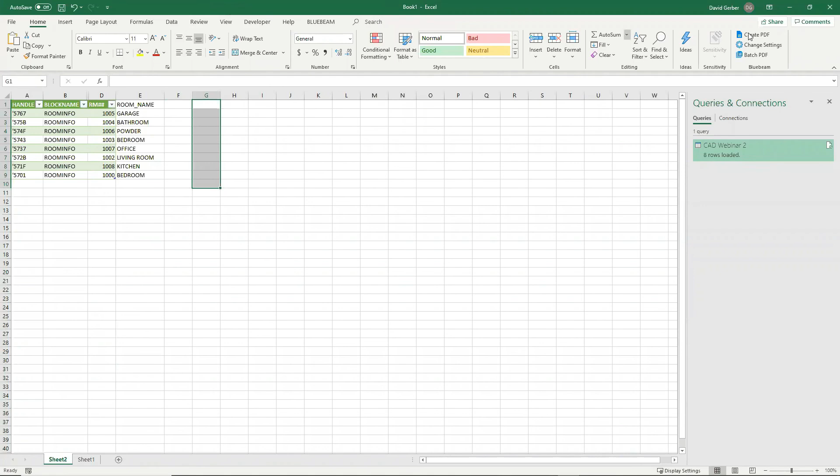I did mess up when I created this block. If I just go into the properties, you'll see that depending on how you select what you want in your block, it's going to put the attributes in the order that you selected it, and I didn't really like that. Ideally in my Excel, I would have had the rooms on this side because then it would be easier to manipulate and then move and hide it. So you can basically, I just recreated that where I have the room name first and then room number. So if you just do block replace, let me just move this over to here.

Block replace - I can either pick the name if you know it, or just pick it directly. So I'm going to select this one and replace it with the edited version. I'll go okay, and then purge, sure. Now if I look at this one in the properties, it changed my block to the edited one instead of the old one.

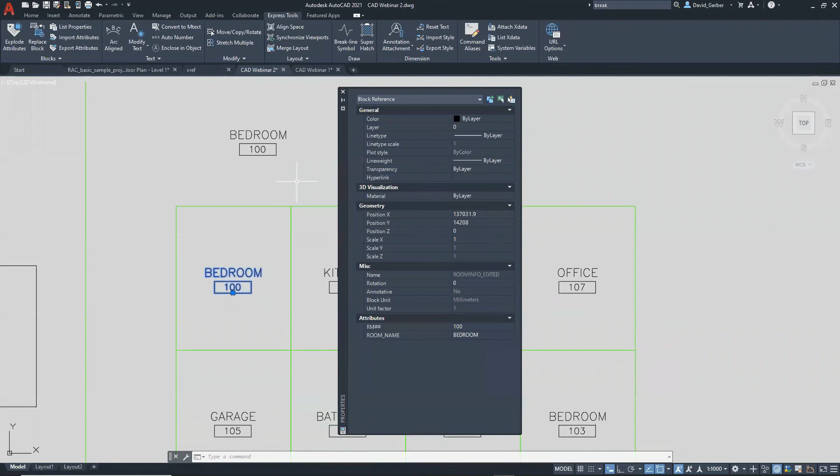Unfortunately, the way you pick your attribute data will specify its order. So if I had more attributes, this could have been scrambled. So either take note of how you are placing them, or just recreate it, which is what I did, and then I just replaced it.

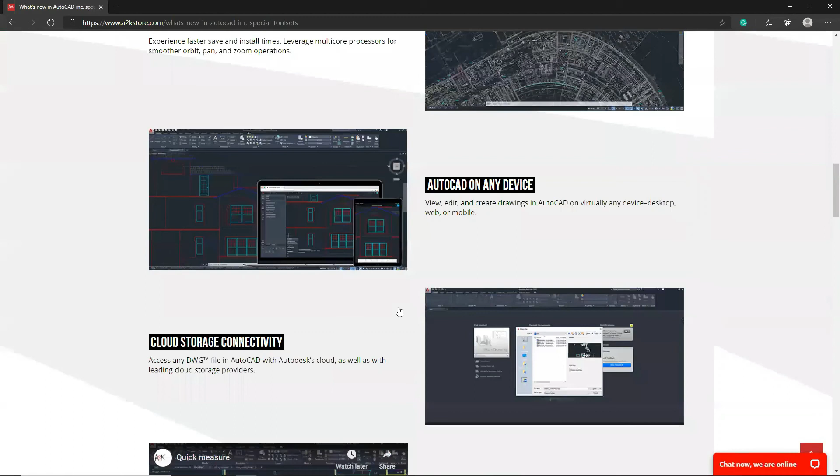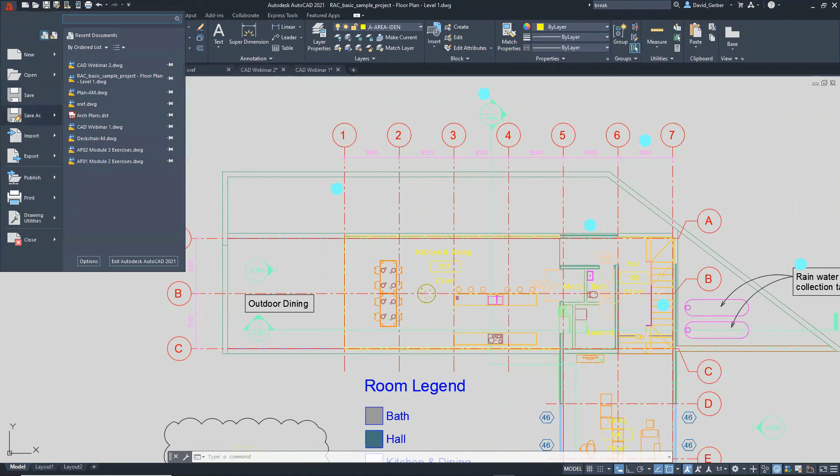Something I forgot to mention - now you can actually use files on Dropbox and the like. For example, this one was on OneDrive. So if I just quickly show you, save as - you'll see that this is actually located on my OneDrive. That way you can open these files up on your iPad or in a different office on a different computer, as long as you have access to that folder.

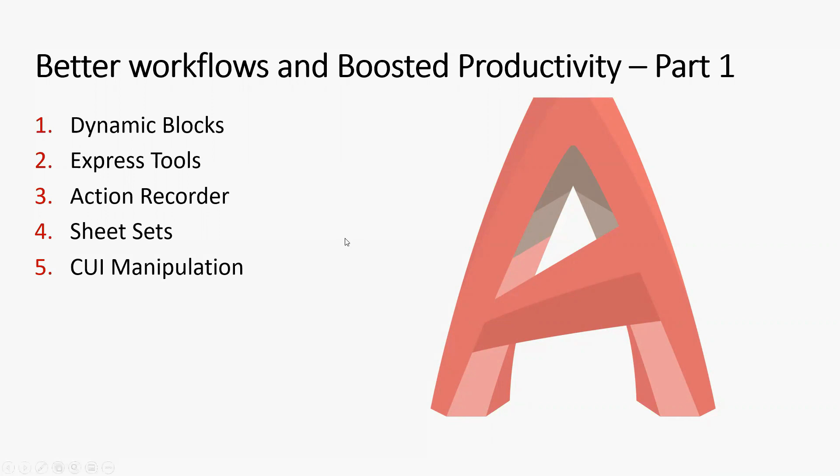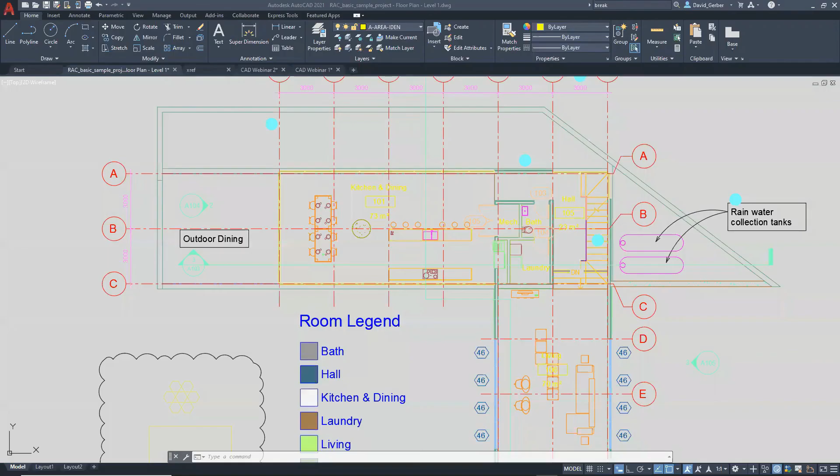Is there a way we can use break at a point at an intersection of 2 lines, or does it get mixed up which line you want to break? Let me open that up. I think you have to select the line that you want anyways, so I'll quickly do something similar. Yeah, see, it says select object, so it won't actually let me select that one. Let me try the other one just to make sure as well - break at point. Yeah, so it's only letting me select on that line, and even there, it's snapped to that one.

Yes, there will be a link to the recording of the presentation, and it'll also be on our YouTube channel.

Will these settings have to be reset when upgrading, or will it be automatic? Which settings? If you mean the CUI, I have the same CUI in my 2020 and 2021, and I just migrated my settings, and all of my custom buttons and macros have come along with it. So it's pretty good at bringing all that over. Even my tool palettes with all my extra stuff have all come over, so like all these blocks and the like, provided those are the settings that you wanted.